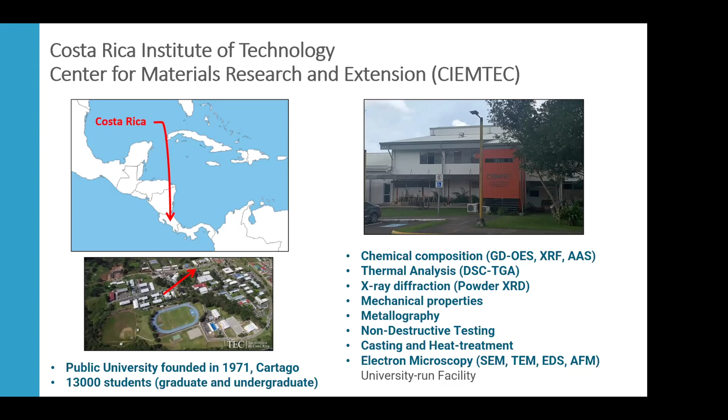So you can see there a list of our main capabilities. Most of the results that I'm going to show you today are done or obtained in our research center.

So here are just a few images to show you, and because this audience of course is interested in the twister and the high pressure torsion, as we call it, the machine: we started this lab about 6 years ago, and gradually have been able to get some equipment. We initially started with a very small scale 10-ton HPT machine donated from Kyushu University in Japan.

And then we were able to upscale our HPT facility to the machine you see, number 3 over here. So the machine over here, this is the time that we installed the hydraulic press. It's a 200-ton hydraulic press.

And in this 200-ton hydraulic press, we designed and installed a torsion system, developed here locally. It has a little bit over 6,500 Newton meters of torque, so it's a very robust torsion system, capable of sustaining the load and then applying the rotation, as I'll explain a little bit later.

We can make tool steel dies here in Costa Rica locally, and also we can get tungsten carbide and cobalt alloy dies for higher hardness materials. We can process 3, 10, and 20 millimeter diameter HPT samples. As you can see here, this is our 20 millimeter die.

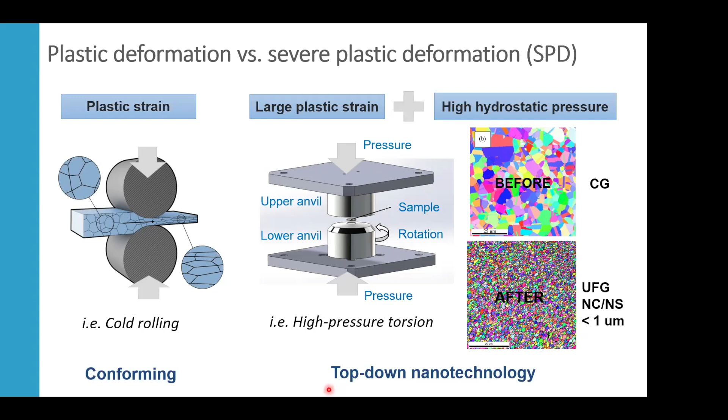Before processing, we usually have coarse-grained microstructures in metallic materials, and then after SPD processes like high pressure torsion, we break down these grains into much smaller grain distributions, with the ultrafine or nanocrystalline size usually well below 1 micron, depending on the metal alloy or crystalline material we process. So it's also considered a top-down nanotechnology synthesis technique.

Going a little deeper into what has been proposed and researched throughout the earlier years of severe plastic deformation: when we use hydrostatic pressure, most of the deformation and strain goes to the material, especially to shearing and creating a lot of crystalline defects, without changing the overall shape of the workpiece. In SPD, one criteria is that we should not significantly change the shape of the workpiece, and by doing this we can increase the pressure and introduce a lot of crystalline defects.

These crystalline defects will evolve with the amount of deformation, first into high density clusters, and these clusters will eventually form subgrain boundaries, which will probably recrystallize into smaller grains. Most metal alloys will then reach a saturation grain size, which occurs because of a balance between dislocation generation and dynamic recrystallization of the grain.

So in a wide variety of ductile metals, the grain size can be significantly reduced when you compare it to conventional methods of plastic deformation. And also we can do it to very hard materials and get usually even smaller equilibrium grain sizes. So it's possible to tailor the fraction of dislocation or the dislocation density of these materials and also the grain size. And we can also, of course, use heat treatment to further tailor these microstructures.

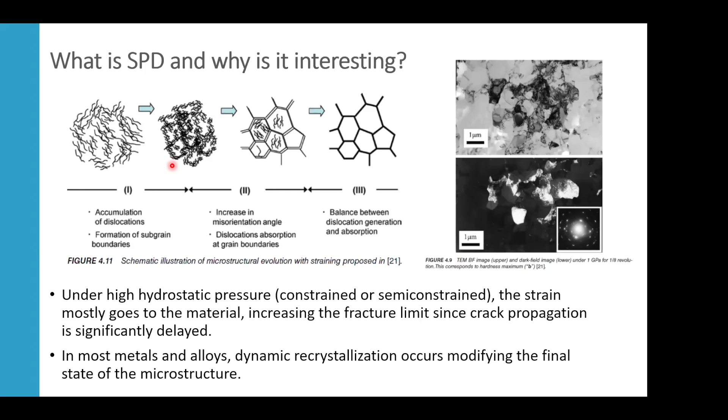So it has been a very classical approach for the SPD research for, I think, already more than 30 years to try to tailor the structural properties, mechanical strength and ductility for many metal alloys.

So as I said before, we have many traditional and also newly proposed SPD methods, such as high pressure torsion or equal channel angular pressing, but many new processes have been developed to try to upscale the work pieces that we can make from these processes, because usually when we constrain the material is when we can get the smaller grains, and it of course takes very large machines and very large loads to upscale the size of metallic work pieces.

So many new continuous methods, or methods that are run in tandem, and also increasing usually the form factor of the workpiece, have been developed and are currently still being researched to upscale the size of the workpieces. But in general, the objective, as I said, is to produce bulk ultrafine grain distributions.

And one of the positive aspects is that we can get very high density, no porosity, with a relatively easy way to do it. We don't need to use any special atmosphere or vacuum or increased temperatures. So usually the cost is just driven by the energy input to the hydraulic press and the torsion system. And it can be done in a wide variety of materials, as I will show you later.

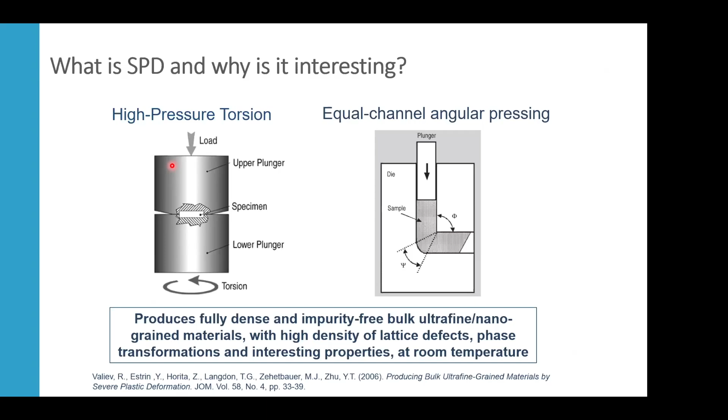So these are more or less the background of the field of high pressure torsion. As I said, we can produce any sample that's circular in shape, like a disc or a ring, and cylinders will also be able to do it, but we have to control the height to radius ratio, the height to diameter ratio, in order to get a very homogeneous or a more homogeneous grain distribution.

But it's also possible to upscale in the thickness of the sample. And usually the strain in high pressure torsion is associated with the shear strain in torsion. So usually N would be the number of turns, R would be the radius from the center, and H would be the sample thickness or the sample height.

And then, although there's been some controversy around it, people argue about what continuous or von Mises or some other continuous deformation criteria we should apply. But for example, logarithmic strain or von Mises strain can be used to calculate the equivalent strain that we can apply with the HPT method, so that we can compare it with other SPD methods such as ECAP and others.

As I said, powder consolidation is possible. For example, here we are looking at titanium oxide powders, and even hard ceramic materials like titanium oxide can be sintered with very high relative density, or very close to 100%, and a very good control of impurities, because the limitation is only the oxide.

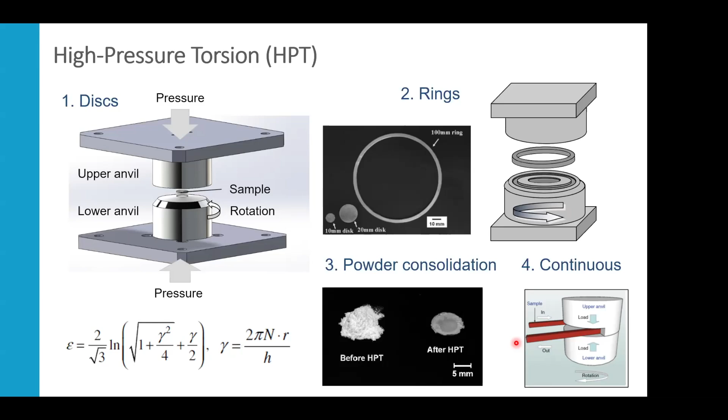So it's more or less what's been going on in terms of the very recent years. As I said, in the very classical start of the field, most of the research was carried out to improve strength and ductility, and investigate the relationship between grain boundaries and grain defects, boundary nature, with the mechanical properties, of course.

And that led to very important formulations of the defects of the SPD process material, the grain boundaries. It's not only that the grains are small, but that the average width of the grain boundary is thicker, that the grain or defect concentration in the boundaries is higher than in conventional materials. So there's more free volume within grain boundaries, and that also increases diffusion activity, and changes the nature not only of mechanical properties, but also some other functional properties that are driven by grain boundaries.

So since we reduce the grain size, the finer grains have more atomic mobility, diffusion is accelerated, and the surface volume of grain boundaries is higher in comparison with coarse grain metals.

So this has started a lot of research, for example, in biocompatible metals, where we need to improve tissue integration, degradability, as we will see, and corrosion resistance, not only in bodily fluids but also in general with any corrosive or chemically corrosive media.

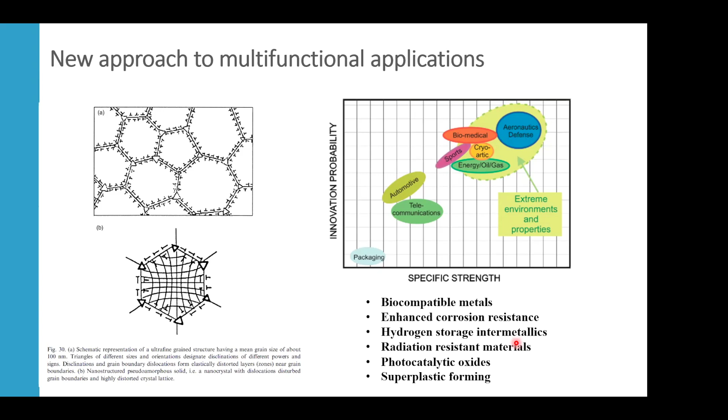So I'm going to talk a little bit about our research results in several metal alloys that are from the biomedical field first.

So the first topic I'm going to talk about in general are titanium alloys, and then we're going to look at some of these titanium alloys.

So in general, for permanent implant applications like hip prosthesis, knee prosthesis, spinal fixation devices, or dental implants, titanium alloys are the most used alloys today, especially replacing stainless steel and also cobalt chromium, because of their improved mechanical compatibility to the human bone.

So in general, the elastic modulus, the Young's modulus of titanium alloys is somewhere ranging between 80 and 120 gigapascals, which is an important improvement from, for example, steels that are around 200 gigapascals, in terms of mechanical compatibility with the human bone, especially for this kind of bone implants.

Also, of course, the tissue integration and the sterility of titanium surfaces in the human body are much improved. And with good mechanical resistance, especially achieved by alloying titanium with other elements, this is driving the research of titanium alloys, not only commercial purity titanium, but also the beta phase titanium alloys.

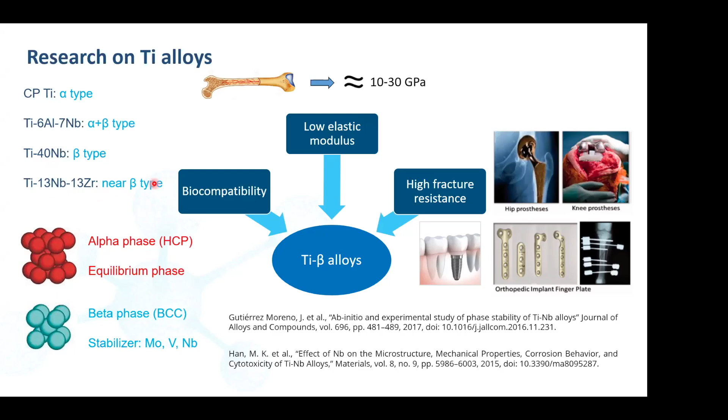And this is what's traditionally been done for titanium alloys. In general, commercial purity titanium, as we will start with this material, has an interesting factor in that it also has allotropy in terms of the change of pressure.

Commercial purity titanium will change to an omega phase. It's a simple hexagonal crystal phase, which is different from the hexagonal compact phase, the alpha phase. And this is a reversible transformation at pressures from 2 to 6 gigapascals.

What was discovered by processing commercial purity titanium by HPT is that we can produce a high fraction of the omega phase, and then this omega phase will stay after we remove the pressure, stabilized by the small grain size and the defects generated by the HPT process.

Usually the omega phase transformation can happen by pressure. The reverse transformation in very pure titanium can be reversed by removal of the pressure, but also it can be removed by increasing the temperature somewhere between 100 and 200 degrees C.

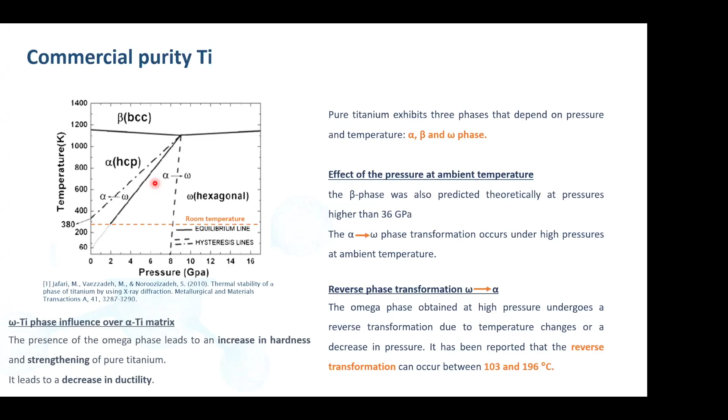So if we apply high pressure torsion to commercial purity titanium, we can get the omega phase stable in a high fraction. The omega phase usually has a higher hardness, and it may be used in some interesting applications, especially because we can increase the strength of commercial purity titanium without the need to add alloying elements.

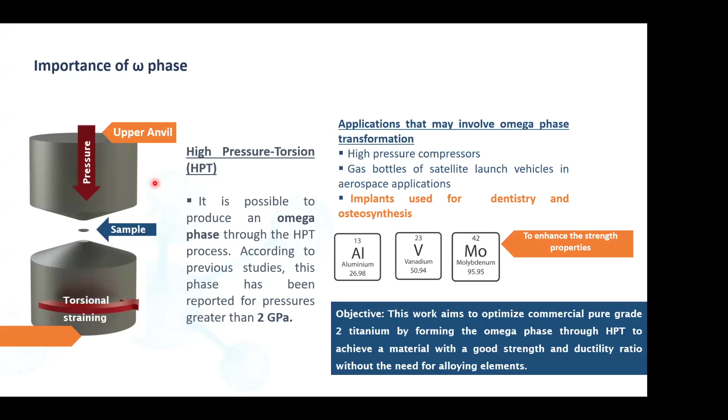We have been working with commercial purity titanium for some time now, and I'm going to show you some results. Very traditionally, what we do, and this will probably repeat for other alloy systems I show, is that after we process by HPT, we can grind and etch and polish and etch the sample to reveal the microstructure by optical or electron microscopy.

We can take hardness indentations, and as I said before, the strain will depend on the radius of the sample, also the number of turns. So measuring a few radii from the center to the edge will give us a nice distribution of how the microstructure is evolving.

Microstructural evolution I will talk about a little bit later, but as I said, once we get a steady state grain size, a saturation grain size, when dislocation generation is balanced by dynamic recrystallization, we will not get further refinement with HPT processing. This gives a chance to material closer to the center to evolve into the fine grain size that we can get firstly in the periphery.

Depending on the number of turns, depending on the distance from the center, we can control, as much as we can, the homogeneity of the ultrafine grain distribution in this way. So measuring the hardness is important for this aspect.

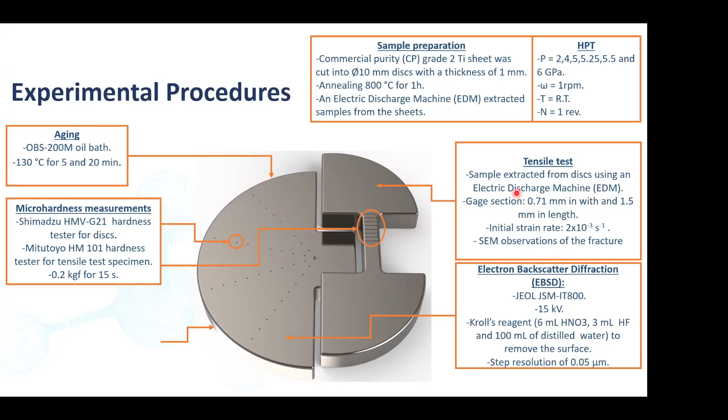Just very briefly, looking here, we did some interesting work changing the pressure in commercial purity titanium. We knew that changing the pressure, for example from 2 to 6, will change the fraction of the omega phase. But if we really wanted to narrow down and tailor how much of the omega phase is formed and how it is formed, we wanted to change very systematically the pressure, as fine as we could.

In general, when we increase the pressure, in the case of this study, we didn't see the omega phase at 2 gigapascals, but when we increased to 5, and we did this at 2, 4, 5, and 6, and also somewhere between 5 and 6, at 5.25, 5.5, and so on, we discovered the change in the fraction. You can see the peak of the omega phase increasing at the expense of the alpha phase.

We also tried aging, to see how aging will change the stability of the omega phase. This is kind of ongoing work, and we've seen that the thermal resistance of the omega phase is better when we produce fine grains by HPT. For example, at 130 degrees C for 20 minutes, we still see the omega phase. This is something we've been testing and are doing at the moment.

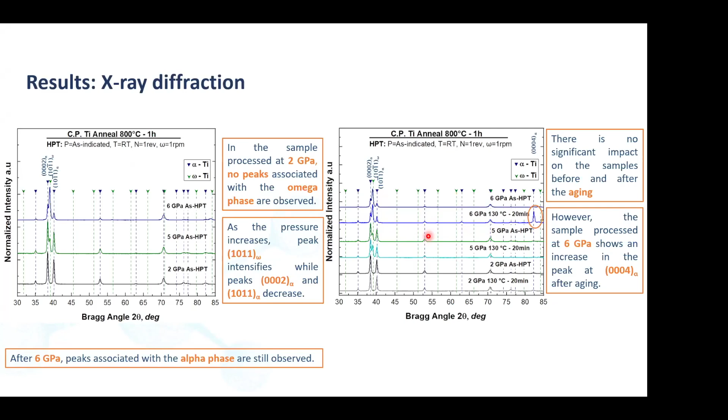Here is plotted the hardness of this material against the distance from the center, showing the effect of pressure on hardness and distance from the center. At 2 gigapascals, 4, 5, 5.25, 5.5, and 6 gigapascals, we get an increasing hardness, gradually at the beginning, but once we get to higher pressure there is a more significant step up in the hardness.

This is a schematic of the area of the disc where we usually take our tensile test, so we can compare the hardness we get here with the actual testing of the tensile strength.

If we age it, something interesting happens. As I said before, the microstructure evolves first at the periphery, which usually has more defects and dislocations, and when we heat treat it, this is the area that statically recrystallizes first. At 20 minutes for 130 degrees C, the material is still thermally stable, but the hardness is dropping.

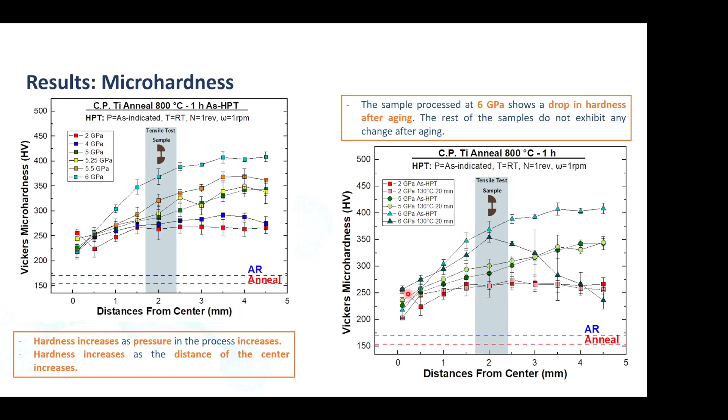Probably if we increase the aging time or temperature, we will see the rest of the material drop back to the normal or closer to the initial state, which is also related to the reverse transformation of the omega to the alpha phase.

One of the most interesting results is where we lose the ductility, another important aspect of the equation. We see that somewhere between 5.25 and 5.5 gigapascals, we lose the ductility abruptly. This is something very interesting that we're interested in further investigating with deeper microstructural analysis than we're capable of doing here in Costa Rica.

So somewhere between 5.25 and 5.5, we see the loss of ductility, while the hardness or strength keeps increasing, seemingly getting to a saturation around 1,000 megapascals, which is great hardness and strength for a titanium alloy, but with loss of ductility. So we can tailor, and we are investigating, which heat treatment condition gives which kind of properties.

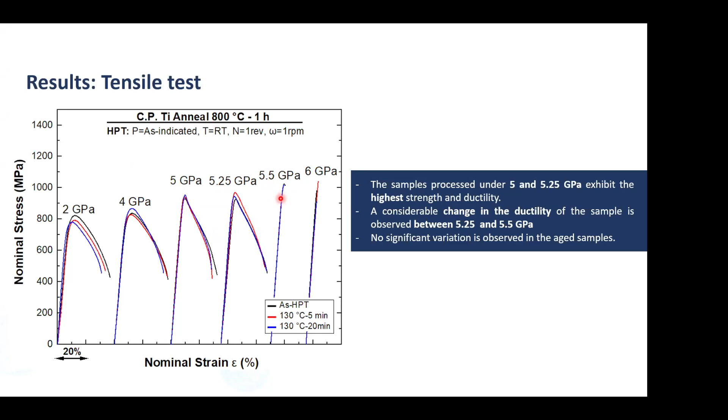If we look at fracture surfaces, it's interesting that at some point the fraction of omega phase makes the failure mode change from ductile to brittle, and that's something we're looking into investigating a little deeper - how much of the omega phase, and what characteristics it has, as pressure and strain increase, as I showed before.

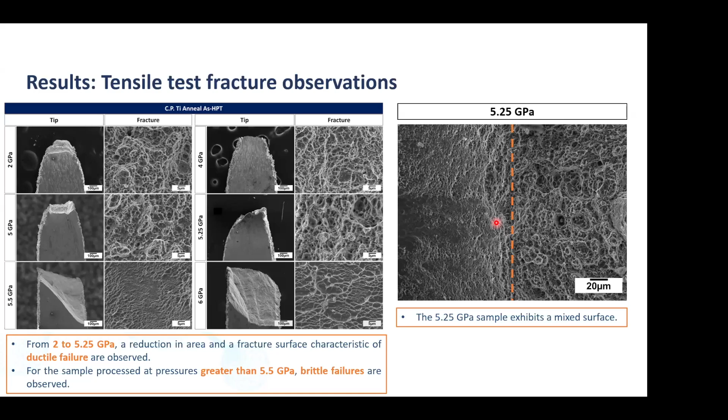We did hardness measurements of the tensile samples and saw something interesting: at the tip of the samples, for example at 5.25, we see a decrease in hardness after we pull. So we think the loss of ductility is probably associated with a dynamic change in the fraction of the omega phase, a reverse transformation driven by the tensile strain, which is something we're looking into.

We took fine hardness indentations along the tip of the failed tensile specimen, comparing samples at 5.25 and 5.5 gigapascals, and we see a hardness drop especially at 5.25, which doesn't happen at 5.5. So something related to the stability of the omega phase is probably also a factor, so that it doesn't revert with the strain.

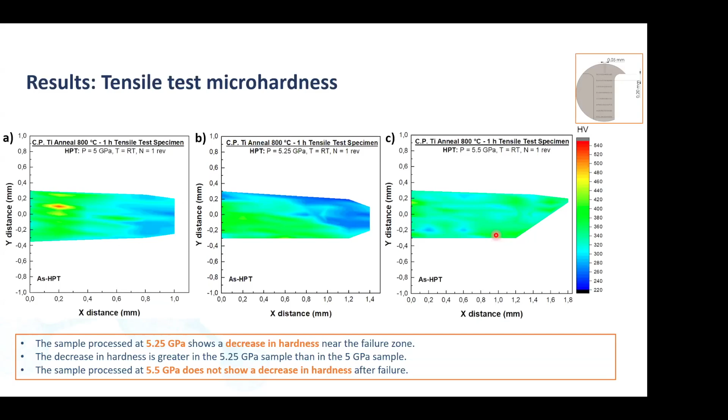These studies were carried out in Japan, investigating the fraction and orientation of the omega and alpha phases, especially at 5 and 6 gigapascals, and also after aging. At 5 gigapascals the fraction is roughly 50-50, but at 6 gigapascals the omega phase fraction is roughly 70-30. When we age it, the alpha phase statically recrystallizes in the microstructure, and we get a lower fraction of omega phase. This is an interesting way to control the mechanical properties of commercial purity titanium alloys.

It's difficult to do EBSD at such fine grain sizes because the grain size is quite small, so the noise and resolution of the EBSD at that scale isn't the best. Looking at these omega and alpha crystal structures at higher magnification using advanced crystallographic techniques, or TEM crystallography for example, could give us more information about this phenomenon.

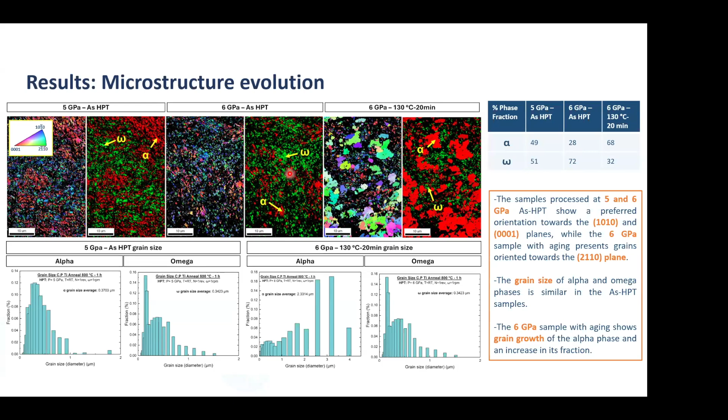Moving a little bit further into alloys, we did some work on beta titanium. One of our most important results revolve around titanium with 25 atomic percent niobium, that's 40% in weight, synthesized from elemental powders.

As I said, the stress shielding effect means that if we put an implant of high Young's modulus material like steel, cobalt, or even alpha titanium, we get an effect where we absorb the load only in the implant, and the surrounding bone does not get stimulated by the daily loading and unloading that we do when we move and walk.

Eventually, people who are implanted with this kind of device may get tissue necrosis around the implant, and the implant will loosen, requiring surgical removal and reinstallation. So if we can find materials lower in elasticity, more comparable to human bone, we can probably avoid this kind of intervention.

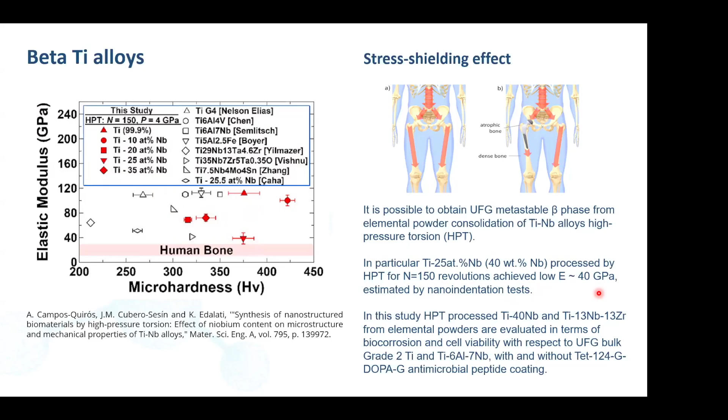And also, we have been doing a little bit of in vitro cellular testing, which will be shown briefly too. So here on the left, you can see how the microstructure can evolve in terms of the powder or elemental distribution.

These are SEM images from the center of the discs. These are EBSD composite maps from the middle portion of the disc radius, and this is the edge, again SEM images. This is the initial powder mixture, and you can see niobium in yellow and titanium in red.

When we do HPT for 10, 50, 150 turns, we can clearly see the elemental mixing, very nicely done, even in the center and the edge. As I said, the strain will depend on the radius, so usually the material at the edge will evolve faster and have a very small grain size.

We did XRD, and we confirmed after 150 turns the microstructure is fully beta phase because of the characteristic peaks, and we see the gradual disappearing of the alpha titanium peak. Even after 10 turns, we don't see it in this composition or this composition. A little bit still at the 25% and 35%, but then gradually after 150 turns, we are fully beta phase.

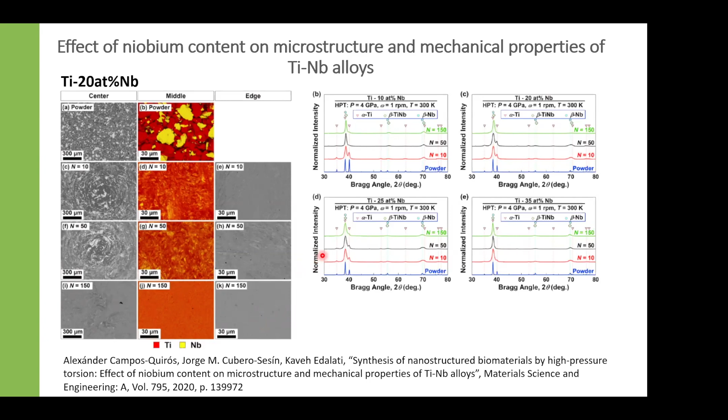This is also a nanocrystalline material with a very small grain size. I will show a couple slides of the microstructure of a similar alloy, but the grain size here is something like 30 to 50 nanometers. It's a very small grain size crystalline material.

Just to show how cell viability goes, we tested a few of our coarse grain versus ultrafine grain HPT materials. We did some coating even with a peptide familiar to titanium surfaces. In terms of fine grain size, we do see a small improvement, but at least we are statistically equivalent in terms of cell viability.

Some research works have shown that cell viability, the integration of cellular tissue, protein adsorption, and cell growth is improved when we use ultrafine-grained materials. We did see a little bit of improvement, but at least they are statistically equivalent.

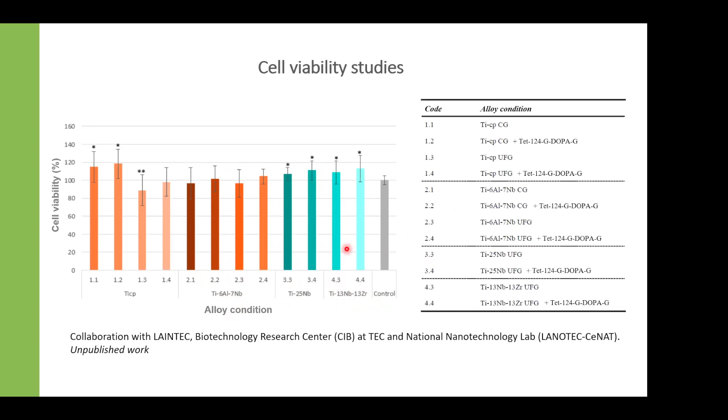What we wanted to show here also is that the powder consolidated titanium 25 atomic percent, as I said, and also we tried the niobium zirconium alloy. They are actually equivalent or better than conventional high strength titanium alloys for implants and commercial purity titanium as well. So we can also apply functional surfaces, biofunctional coatings to these materials, and it's a promising application we are looking into for manufacturing small medical devices and prototypes.

We also tried high entropy alloys, titanium-based, with titanium, niobium, zirconium, tantalum, and hafnium. The story is more or less the same, with the merit that these are five elements that are hard to mix usually, and the HPT process can mix them.

After 50 turns, we have a very nice homogeneous elemental distribution, and also very small grains. So here you can see in the TEM, the grains are actually very, very small. The sample is truly nanocrystalline.

There is some degree of amorphization after 50 turns, but you can see here in the diffraction pattern that we have a truly nanocrystalline material. This is the bright field image, and this is the dark field image.

We calculated the crystal size or grain size is somewhere about 10 nanometers, even after we add 5 elements and process for 50 turns.

And you can see here the beta phase peak. It's a very wide peak, full of dislocations. It's a very defected structure, but at the end of the day, it's a beta phase, and we can actually tailor it with heat treatment, probably.

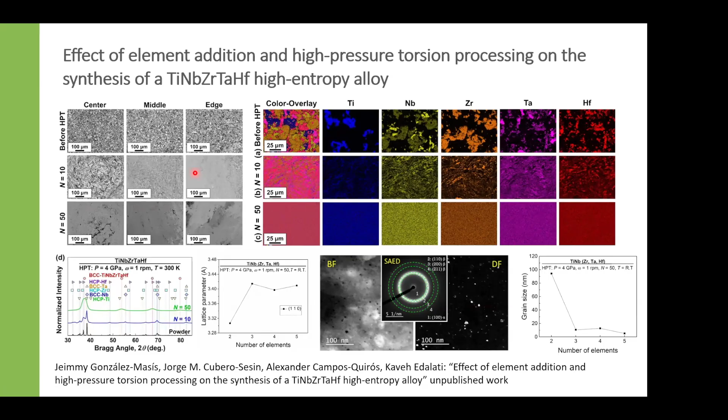Okay, so that's a summary of what we've done around titanium alloys.

More recently, we have been working with bioabsorbable magnesium alloys, and in this case, we're actually looking to have the implant absorb into the bone after the fracture or whatever fixation or repair that we need to do in the healing of the bone.

So traditionally, in bioabsorbable materials, we actually have to control the corrosion rate of the metal with respect to the mechanical integrity of the whole assembly, the bone implant assembly.

So one of the advantages of having bioabsorbable alloys is that, for example, we don't need to keep a permanent titanium implant after the bone has healed, and this can help avoid pain, inflammation, and discomfort. Using magnesium for example is very interesting for this purpose.

It's a very vital element, and also incorporation of other similar elements can improve the corrosion rate. Actually, the challenge with magnesium is that it degrades fast in the human body.

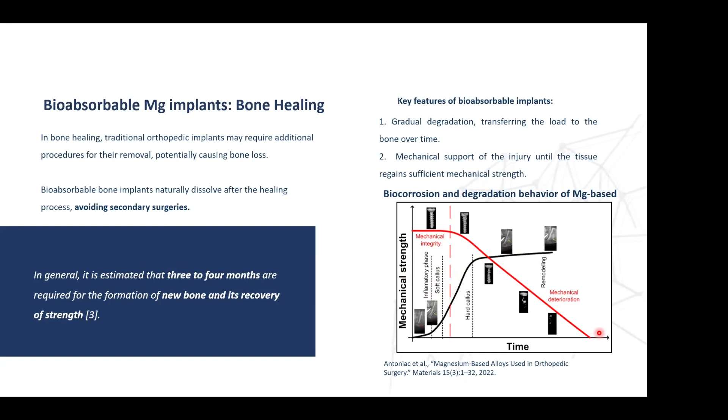So if we can get mechanical integrity still after hard callus formation, then the bone can continue healing as the rate of absorption of the implant continues, or even faster. So the work in bioabsorbable magnesium alloys has been in controlling or reducing the corrosion rate.

So if we look at the mechanism for bioabsorbability, it is related at some point with the grain size. It's related to the grain size.

So once we start, usually with galvanic corrosion, but then some protective film is formed, mostly from the formation of magnesium hydroxide, and also there is some hydrogen evolution in this reaction.

And then the formation of this film will interact very nicely with bone minerals like calcium ions or phosphate ions present in hydroxyapatite, which is the bone mineral.

Then we'll see that gradually, material absorption is controlled by grain boundaries. Usually, after the passive film has been absorbed, corrosion proceeds as intergranular corrosion, and it's usually associated with the grain size.

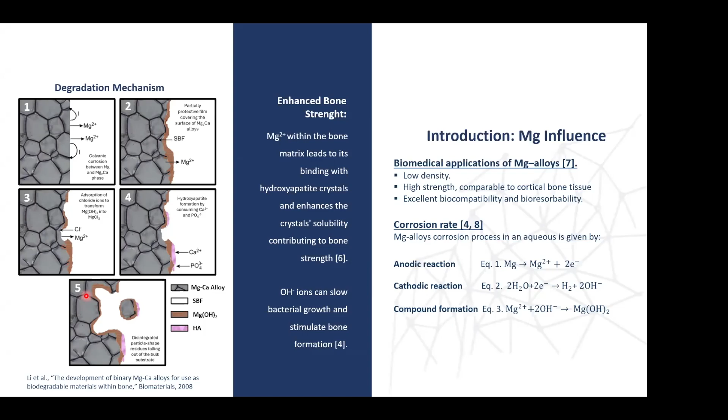So reducing the grain size is one option that we wanted to try to improve the corrosion resistance, or reduce the corrosion rate, of magnesium alloys.

And traditionally, people have used calcium also as an element that has good biocompatibility, but also can decrease the rate of corrosion in magnesium alloys.

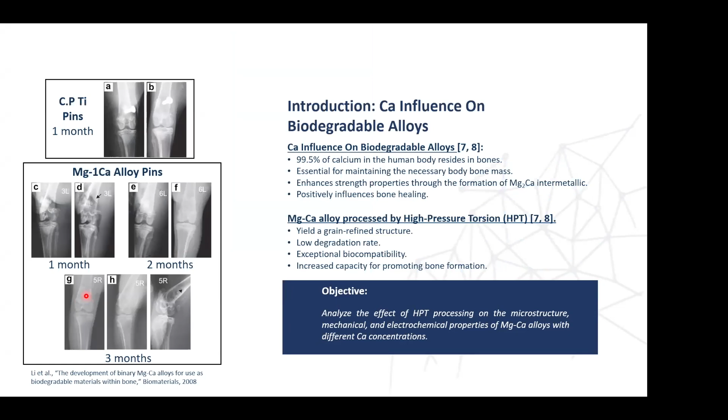So we tried this, and some people have of course used magnesium-calcium as a standard alloy for controlling or testing as a potential material for biodegradability.

So we did HPT on magnesium-calcium alloys. 1% calcium and 5% calcium were what we tried firstly and most successfully.

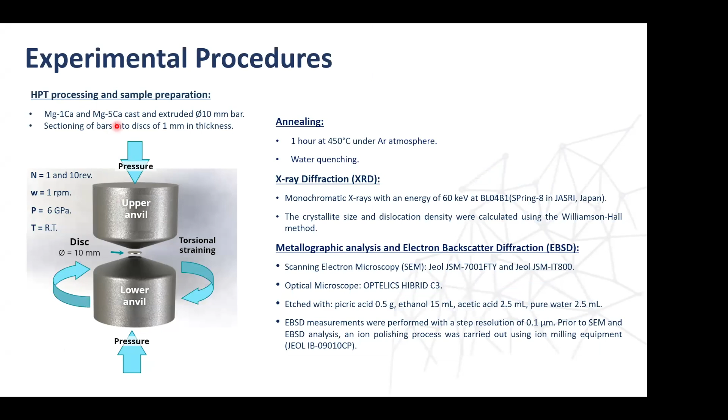And we did a very similar processing and characterization as we did for the titanium alloys, so I'm going to go a little bit faster here. We investigated the microstructure by SEM too, did EBSD observations, and performed the tensile test. We have the capability to do this kind of micro tensile test in Costa Rica as well, so it's a good way to see the mechanical properties.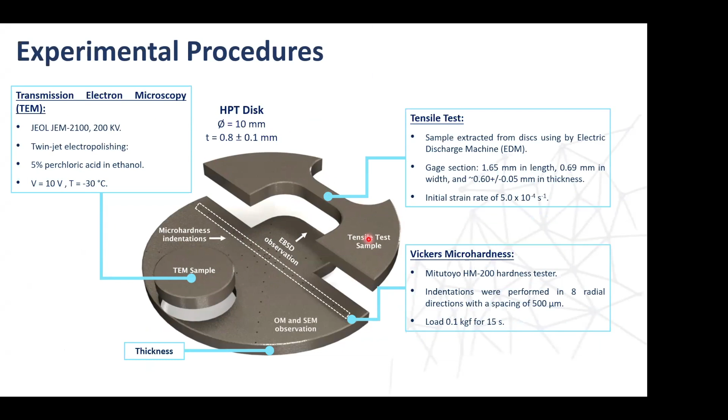We also tested corrosion in Hank's solution, which is the simulated bodily fluid electrolyte. We tested this electrolyte in an electrochemical cell, controlling temperature with a double boiler. We have the setup here to carry out linear sweep voltammetry and electrochemical impedance spectroscopy, applying standard models for measuring corrosion speed, polarization resistance, and other indicators of corrosion resistance and degradability.

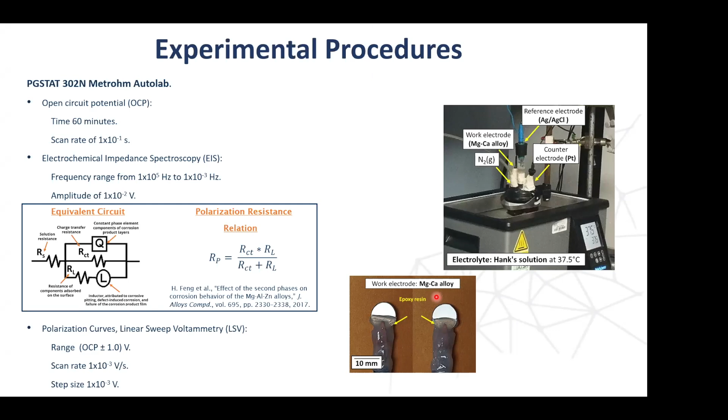So we process the HPT magnesium calcium alloys. We prepare the surface, usually working fast because oxidation is quick in these materials. We protect the connection with epoxy resin and make a connection to the electrolyte so that we can expose the bulk ultrafine-grained microstructure to biodegradation.

Usually magnesium calcium will have a magnesium matrix and second phase particles composed of magnesium to calcium. We started from an annealed microstructure, using extruded bars given to us from the Magnesium Research Center in Japan. We cut discs from these extruded bars and processed them by HPT.

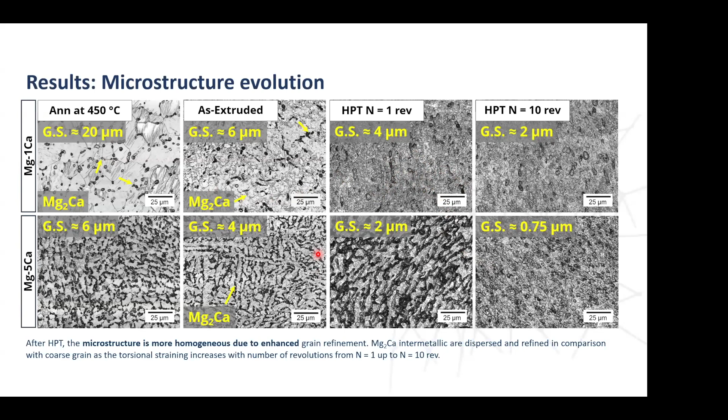You can probably see this more clearly in backscatter images in SEM. So controlling the particles, that's important.

What we did see is that in the case of magnesium calcium, we had a somewhat heterogeneous microstructure where some areas were a little coarser in grains than others. We found some areas where the average grain size could be 2 microns, but if we go to some other regions, the grain size can be significantly reduced.

As you can see, for example, from the bright field and dark field images here, grains can be as small as 200 nanometers or 100 nanometers. We also saw dispersion of these precipitates, or dispersed particles of magnesium to calcium.

At the deformation we did, which is 10 turns at 6 gigapascals, the microstructure is still heterogeneous. So we are looking into increasing the pressure, or increasing the strain, or using large form factor samples so we don't need to increase the number of turns so much. With a larger sample at sufficient pressure, we can probably get a more homogeneous grain size.

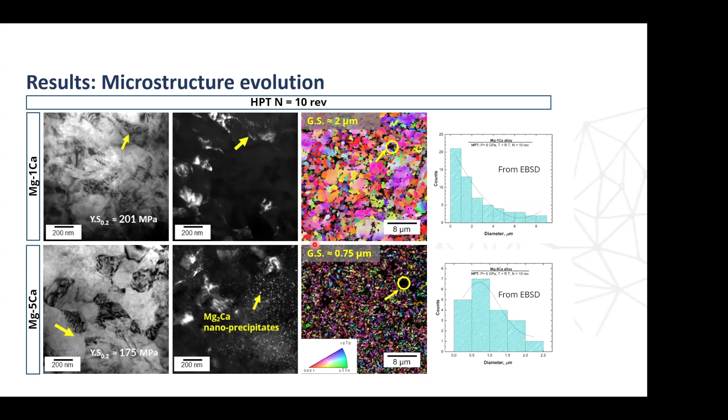But nonetheless, we do see deformation strain on the microstructures. We see the dispersion of the magnesium to calcium, shown by gradual disappearance of the magnesium to calcium peaks by XRD. We calculated crystallite size and defects from these materials, and they are, of course, well deformed microstructures.

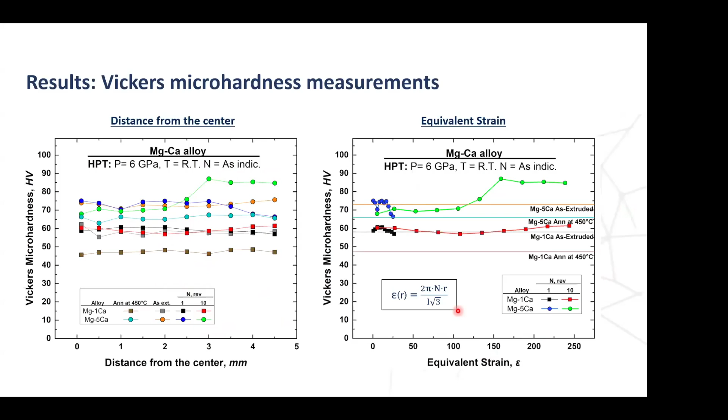Tensile tests we did, and we got very good behavior, especially with magnesium 1 calcium at 10 turns, with strength around 208 megapascals and ductility of 33%. The way we measure it, it's best to compare between samples, because the samples are relatively small and we don't compensate for machine elongation, so comparatively we see that this is the best. This is probably not the actual nominal ductility, but we do see that it's improved. Also magnesium 5 calcium at 10 turns is reasonably well behaved.

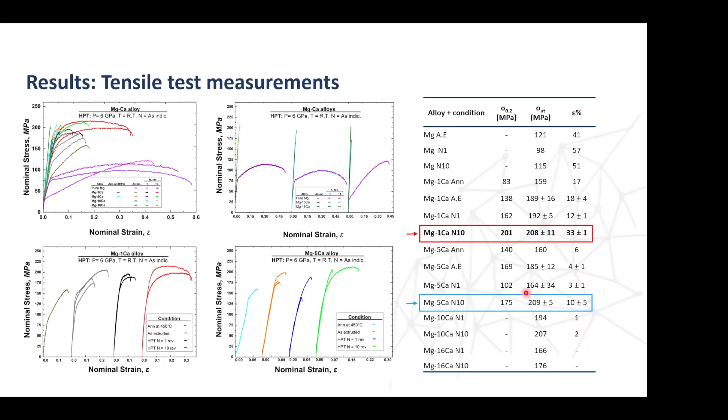Fracture surface is mostly ductile, as I showed before, so I will just skip this part.

We got the lowest corrosion rate of 0.43 millimeters per year in magnesium 1 calcium at 10 turns, which, as you saw before, is also one of the best in terms of mechanical behavior. So very promising—this is one of the lowest values when we looked at the literature.

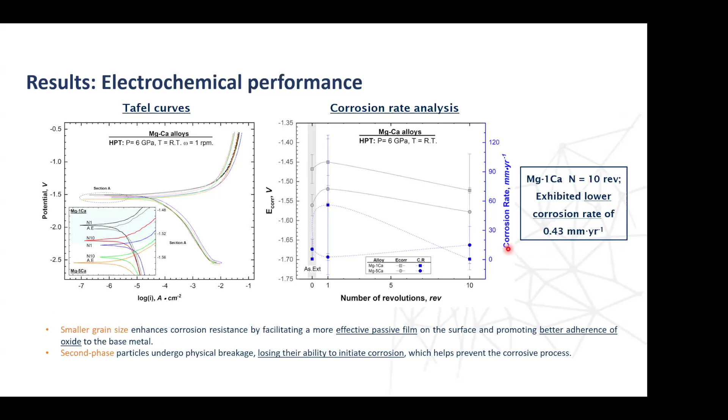So actually, the grain refinement and the mechanical behavior of this material is promising for metal implants as is. And of course, we can still add other alloying elements or try other elemental configurations that may improve some of the disadvantages for potential applications of this kind of biomedical alloys.

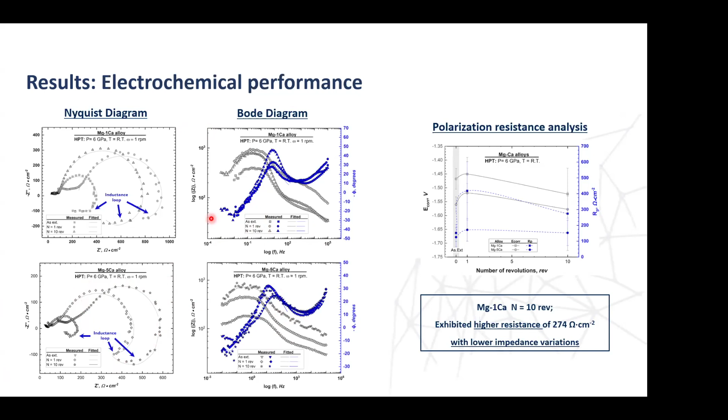In terms of electrochemical impedance spectroscopy, we calculated the polarization resistance, which is highest in magnesium 1 calcium 10 turns, associated with higher corrosion resistance, consistent with the voltammetry. In this Nyquist plot, the larger the size of the loop, the higher the corrosion resistance, measured in terms of the resistance of the film between the material and the electrolyte. The same can be said for the Bode diagram, another way to measure corrosion resistance.

We checked the surface morphology, and along the fine grains we see pitting corrosion and what's called mud crack patterns. From this we can see that the corrosion degradation proceeds rather homogeneously along grain boundaries, so the smaller the grain size, the more it improves the biodegradability behavior.

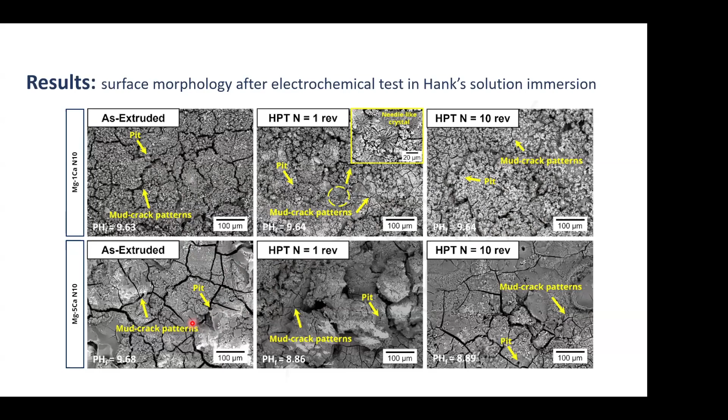Okay. So how much time do I have left? Maybe 15 minutes? Technically only a couple of minutes. Oh, okay, sorry. No problem, well then, yes, that's good.

So that was the main point, to look at the biomedical materials, and now I'll show you some of the work we're doing on energy materials.

In this case, we've been doing some work with metal air batteries. What we said before about magnesium and corrosion resistance can be applied to some other mechanisms. For example, in metal air batteries, the idea is to corrode the anode, the metal anode, in this case aluminum, placed in front of an air cathode with a necessary electrolyte to get electrical energy from the oxidation of the aluminum.

Controlling the corrosion rate in this case is also important to produce a high energy density. Theoretically, aluminum air batteries are one of the best in terms of volumetric energy density, but the problem is that self-corrosion and the parasitic reaction producing hydrogen inhibit getting the most out of these batteries in terms of electrical discharge.

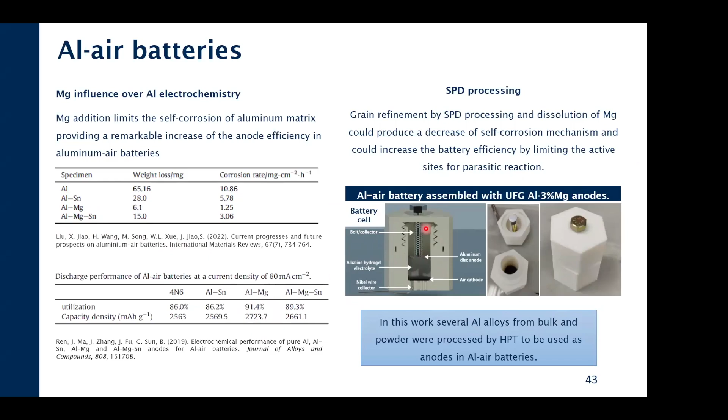So to summarize, we tried the standard aluminum magnesium system, one of the most important prototype systems for this kind of battery. In collaboration with the University of Costa Rica, we assembled them into a battery cell. We produced aluminum anodes by high-pressure torsion, placed into a potassium hydroxide gel electrolyte with an air cathode that we buy commercially, and tested this battery prototype in the potentiostat.

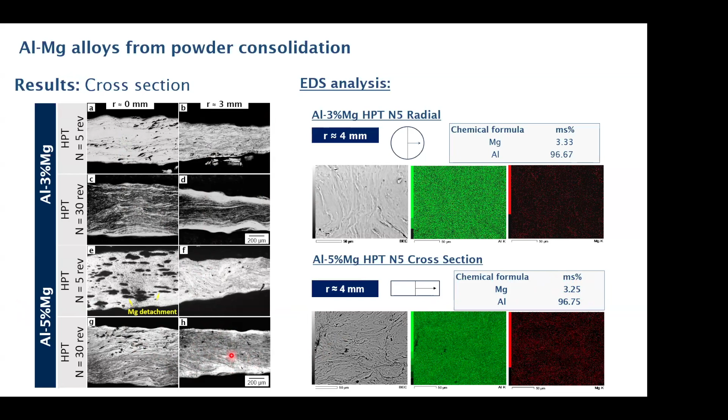This is one of the works we've been doing, and we've been consolidating powders, increasing the amount of magnesium and the amount of strain. Here are cross sections of discs, this is the center and this is the edge. What we see is that we can add more magnesium and refine the beta magnesium aluminum magnesium particles. At the edge of the disc we see fewer of these particles. We can dissolve a high amount of magnesium, 3%, which is kind of the solubility limit, so it's a saturated magnesium aluminum microstructure, probably driving some of the good behavior.

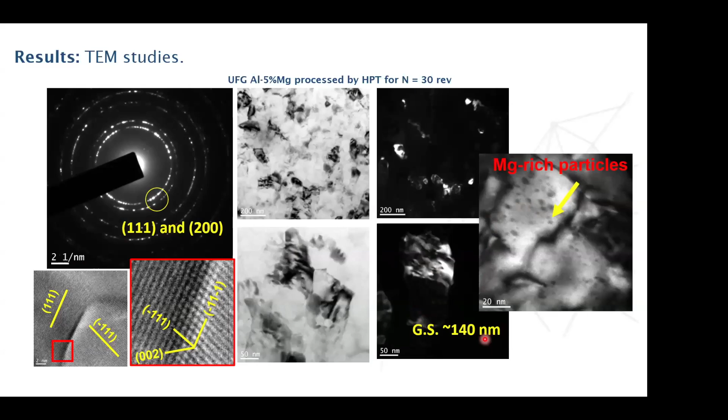It's ultra-fine grained, of course, and you can see with the SAED pattern the grains are very small with high angles of misorientation. We also see this kind of dispersion of intermetallic particles, which is a merit of the HPT process. The grain size is about 140 nanometers in aluminum.

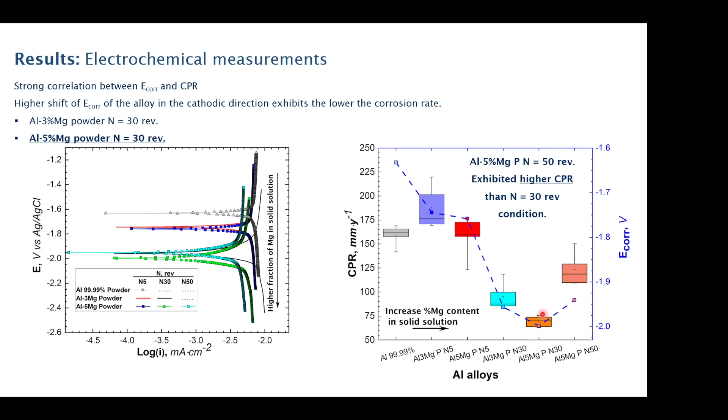We did see very good improvements. As you can see here, with aluminum 5 magnesium at 30 turns, or aluminum 3 magnesium at 30 turns, we get the lower corrosion voltage. We also tested corrosion penetration rate, putting the samples in the electrolyte and measuring the weight to see how quickly they degrade. Actually, this aluminum 5 magnesium with 30 turns was the best in this case.

So unfortunately, the powder consolidated was a little bit less stable, but we do see that the center is probably one of our biggest challenges because it corrodes a little bit faster, and then that probably makes this kind of discharge curves not so steady as we would like. So improving the dispersion and the grain refinement in the center using the HPT process for this kind of batteries is the challenge, but we are working on solving this problem.

I think I see one hand up. I don't know if there's a question. Sorry, I just see it. There's a Q&A, sorry. Okay, if you want to take the questions now, we can, or we can do them after you're finished.

There's research in hydrogen storage, as I said. This is kind of complex intermetallic phases. We can refine them with HPT and get, for example, higher kinetics in hydrogen absorption. We are doing some of this work. We did a little bit of earlier work with titanium oxide.

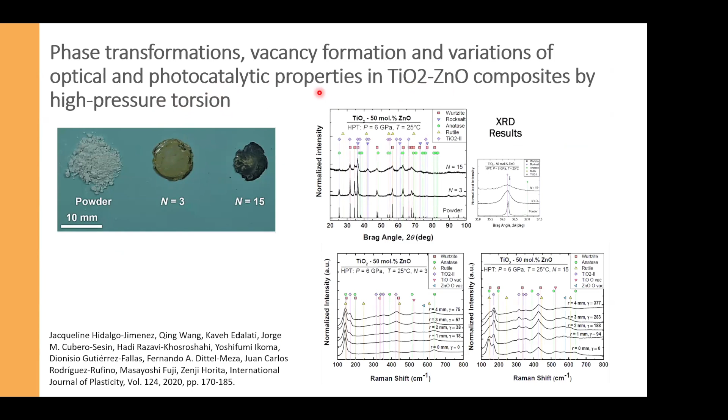We can synthesize it, as you see here, and for example, this kind of oxide is interesting for photocatalytic conversion, for example turning light into energy. We see that changing the crystal structure of titanium oxide has been proven to displace the absorption spectrum to the visible light. So that's promising for further photocatalytic conversion, and this kind of material for energy conversion, getting electrical energy from the sun.

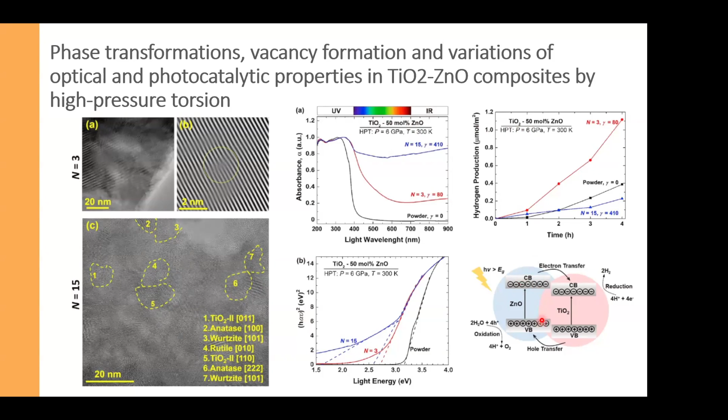So just to end up, as you saw from our work, probably improving the amount of pressure, the amount of strain without giving so much turns, for example using a larger press, a larger capacity machine, can help. And of course, advanced microscopy investigation to check detail in terms of the phases that we have, the relationship between grain boundaries and some other defects, can probably give us some answers about this behavior of these multifunctional properties that I just talked about.

I want to finish with that. I probably extended a little bit here, but thank you so much for the attention, and I'm glad to answer some questions.

Okay, thank you, Doug. And I saw Sibo had his hand raised first. Oh, hey, can you hear me?

Yep. Yeah, thank you for the great talk, that's a very impressive result. This is Sibo from ASU, also working together with FORCE on the Twister. We're also using the twister technology to synthesize some metal samples, but we actually see a lot of cracks forming in the samples. Have you ever observed similar problems, or do you have any advice on how to avoid those cracks in the sample? What's the material that you're doing?

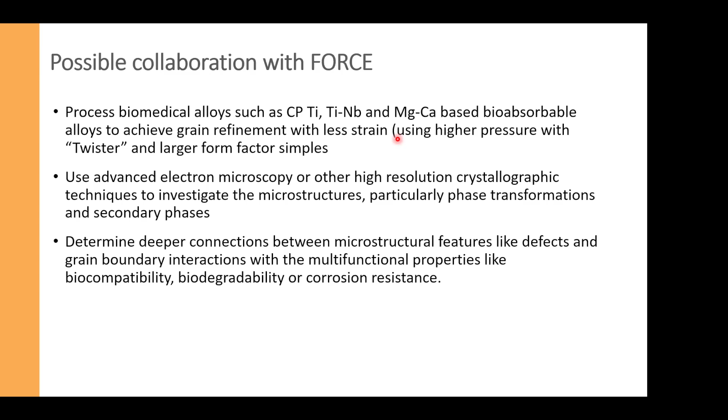Good. Actually, the very beginnings of high pressure research by Bridgman in the 1930s were done at Harvard geology research. He promoted this kind of work as simulating rock under pressure, like tectonic plates, and it's a similar field - he tested many materials including minerals, simulating effects like earthquakes or geological formations with pressure at deeper layers of the crust. So that's an interesting thing that drove this work into materials science.

Yeah, I guess that was really cool, just thinking about how you can use the degradation of a material to your advantage in some applications. Yes, especially for batteries, and it's good because we don't need a large workpiece for a battery, so we can increase the size with other methods, like processing continuously on a sheet of metal and then getting the anodes later. So it probably makes sense if the behavior is actually very good. Yeah, but we cannot put enough strain, so we need sufficient strain - that's the challenge.